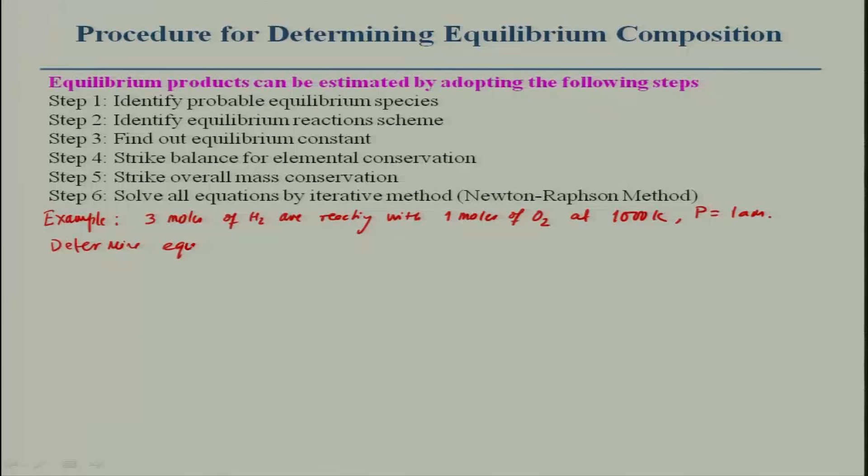In this example, 3 moles of hydrogen are reacting with 1 mole of oxygen at 1000 Kelvin and pressure 1 atmosphere, and we will determine the equilibrium products. So 3 moles of hydrogen react with 1 mole of oxygen going to the products. Of course, what will be the product?

Step 1 is to identify the probable species at equilibrium. So what are those species? Definitely H2. Then definitely oxygen, then water, and what else? H, O, and OH. Let us say we take this number of species. I can take more also, but in this case these are the probable ones.

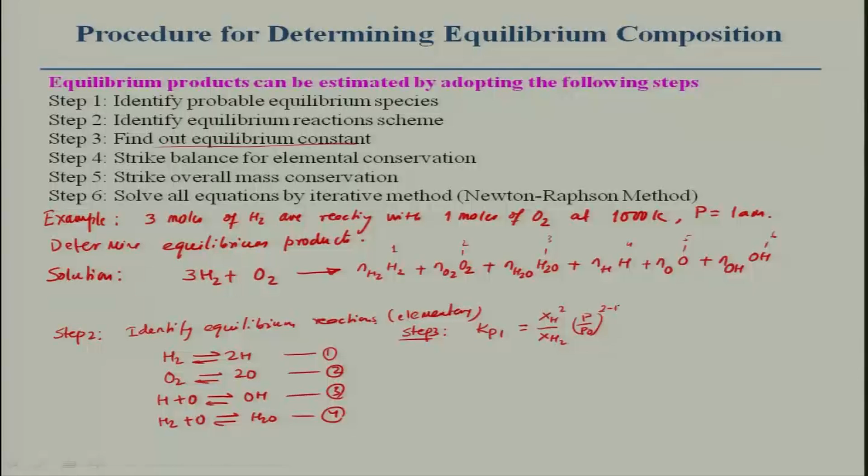If you look at the formula I had derived for arbitrary reactions, you can use that, or you can use partial pressures and then convert. So, in this example P is 1 atmosphere, and P naught is also atmospheric pressure. That means P by P naught is always 1 in this example, so Kp1 is equal to XH square by XH2.

Can I not say this is equal to e to the power minus delta G T naught divided by RU T? So, I can write down 2 G H T naught minus G H2 T naught, divided by RU T, and these are known from the table corresponding to this temperature, 1000 Kelvin. RU is known, T is 1000 Kelvin, and from the table I can get these values. I will not do that, but I can get them.

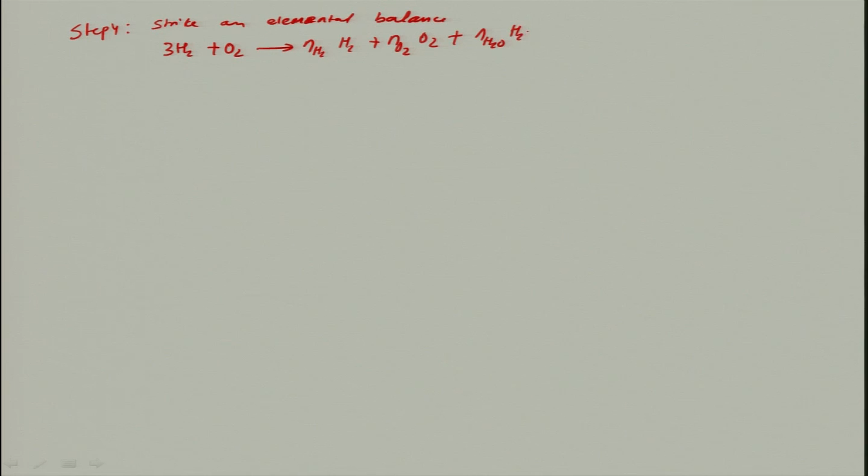So, let me write down what we did: 3 H2 plus O2 going to N H2 H2 plus N O2 O2 plus N H2O H2O plus N H H plus N O O plus N OH OH. This looks like eta, but it is actually N.

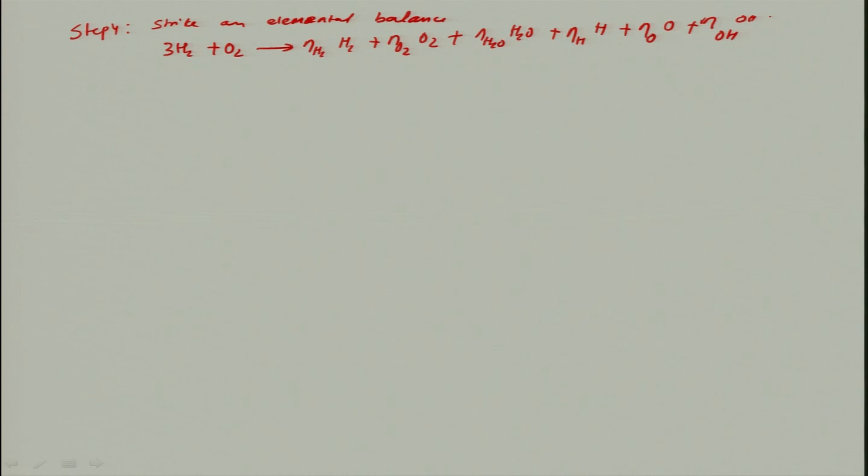So, the total number of H moles given, NH, is 6, because 3 moles of hydrogen. And NO, total moles of O, is it 3 or 2? Because 1 mole of oxygen, it is 2. So, we will have to do an elemental balance.

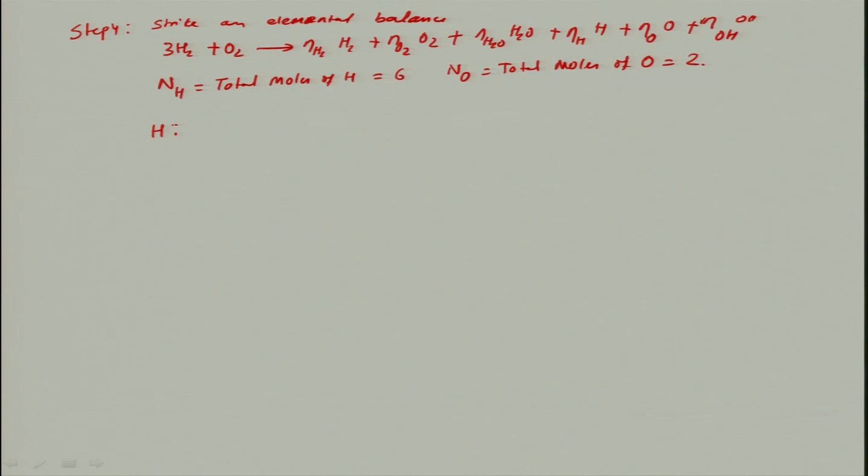So, for H, what I will be doing: 2 N H2 plus 2 N H2O, because we are looking at the product side, and then N H, only one is there, then N OH, is equal to what?

NH, yes or no? Total number of moles in the product should be same as whatever is there in the reactant. Similarly, for O, I will get 2 NO2, right, and N water, because this is 1 O in the product and this is 0 because there is no O, and in this case it will be NO plus NOH is equal to NO, right.

Let us say this is equation A, this is B. I will just divide it, right. Should I divide? What will I get if I divide? That means NH by NO I know, and then I will find it, but these are in moles, and I need to express them in terms of mole fraction. So what will I have to do? I will have to divide this equation by N total number of moles, right.

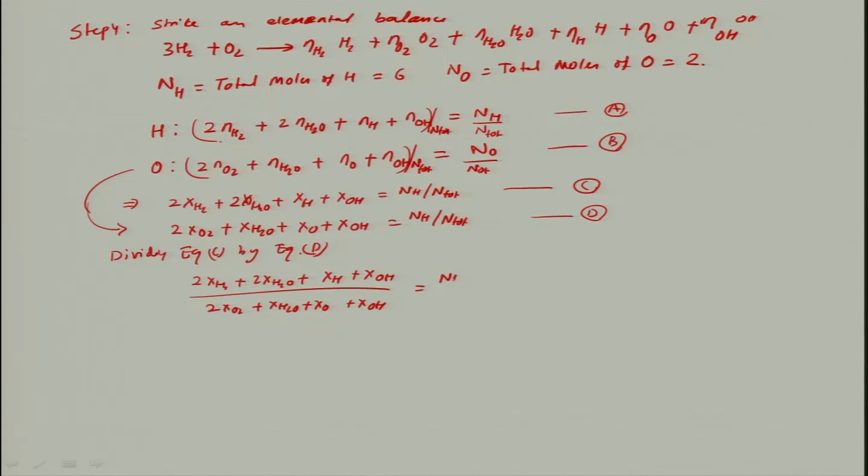If I say this is C and D, dividing equation C by equation D, what will we get? 2xH2 plus 2xH2O plus xH plus xOH divided by 2xO2 plus xH2O plus xO plus xOH is equal to NH by NO. Okay, there is an error here, NO in equation D. N total cancels out, and this will be equation 9.

Now, NH is known or not? NO is known. So these are unknowns and you will have to evaluate them. And what will I do now? Step 5. Close the equations. Basically, you will have to balance. What is that? Summation of mole fractions equal to 1, because these are 5 equations and 6 unknowns. So we will have to close the equations.

For that, this is equal to xH2 plus xO2 plus x water plus xH plus xO plus xOH is equal to 1. This is 10. That means equations 5, 6, 7, 8, 9 and 10 are to be solved simultaneously.

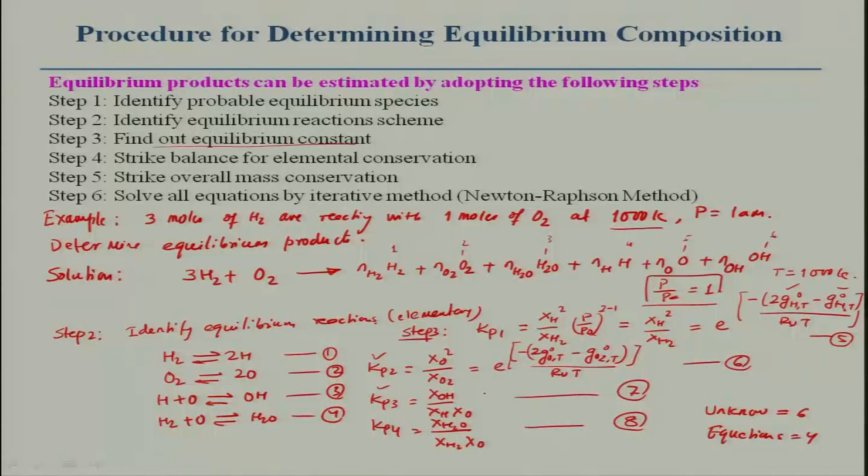See, if it is a linear equation, you know how to solve it, but if it is a non-linear equation, it will be difficult. Why is it non-linear? Can anybody tell me why? You will have to go back to equations 5 and 6. If you look, this is xH square, xO square, and xH xO. So, therefore, these are non-linear in nature,

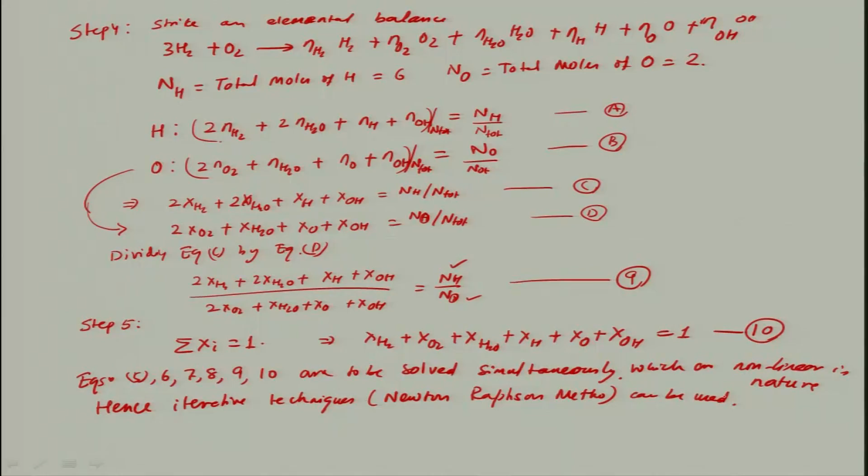hence iterative techniques like numerical methods can be used, and one is the Newton Raphson method. So it is not that easy to really do this. You are talking about the case where the temperature is known and the equivalence ratio or fuel air ratio is known, and then you are finding the compositions.

Now, imagine the adiabatic temperature is not known. For a fuel air mixture, you do not know the temperature. How will we get this composition? These are all interlinked, because temperature is dependent on this composition. Why? Because Gibbs free energy is dependent on the temperature, and since Gibbs free energy is different, the Kp values will be different. So, therefore, the composition will be different. Are you getting it?

How will we do it? It is a very difficult thing, and you will have to do it iteratively. Now we are going to see how. We have to devise a procedure for determining equilibrium compositions, that means mole fractions of species, and also adiabatic temperature, both are interlinked. Okay. So I will just tell you the procedure.

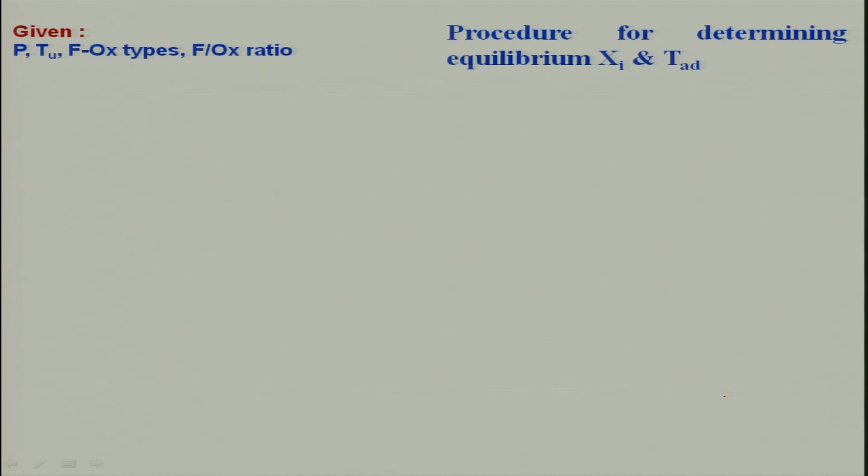Given that pressure is given and the unburnt temperature is given, it need not be 298 Kelvin, it may be 600, it may be 500, whatever, or it may be 298 Kelvin. And the fuel oxidizer type, whether it is hydrogen air, methane air, propane oxygen or kerosene oxygen, also has to be known, otherwise you cannot do it. And the fuel oxidizer ratio has to be given. Is that clear? This has to be given.

Now, what you will do? You will have to assume an adiabatic temperature, because we have already seen in the last procedure that temperature should be known, then only I can find out composition. So, I will assume a T adiabatic temperature. Then compute the equilibrium composition at a particular pressure and adiabatic temperature; we have already seen how we will have to do that iteratively. Okay. That is also iterative. This is an iteration inside iteration, you will have to do that now.

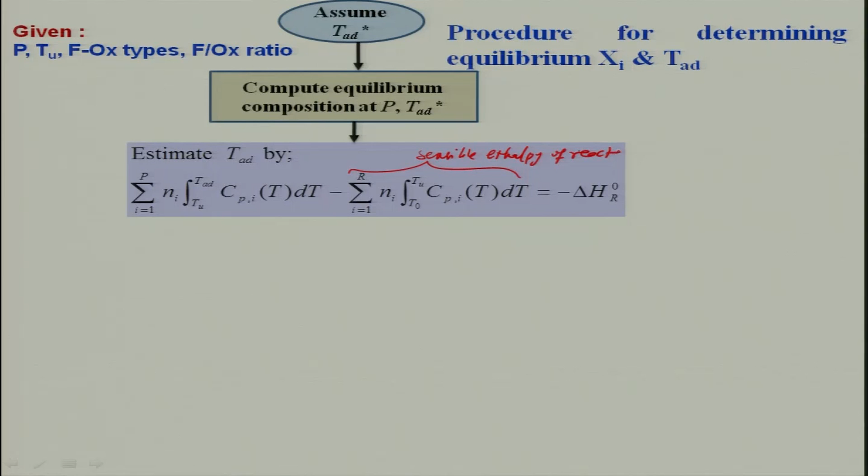Okay. So, then what you will do? You will estimate the adiabatic temperature by, this is your sensible enthalpy, right. This is your sensible enthalpy of the product and this is the sensible enthalpy of the reactant. Are you getting? Of reactants. This is sensible enthalpy of product.

Involving various species. Ni will be various species. If it is a product, if I consider methane, there might be 20 species or 10 species, at least 15 species kind of things, right. And if it is a reactant, of course, if it is methane-air, only methane, oxygen, nitrogen, right. Reactant will be easier to handle, but product will be several of them.

Now once you have found out the composition, that means you know this Ni, right, or in terms of mole fractions, then you can do it very easily, and this is nothing but your heat of reaction. This is heat of reaction at STP, right. And then by this you will find out T adiabatic, because you will have to integrate. Keep in mind this Cp is a function of temperature, right, that you will have to plug in and then integrate. That integration is not that easy.

The way we did the example is not the way, okay. There you will have to integrate, because for the various temperature ranges you will have to use different Cp values. I had shown that, I think, right. And then you will have to find it.

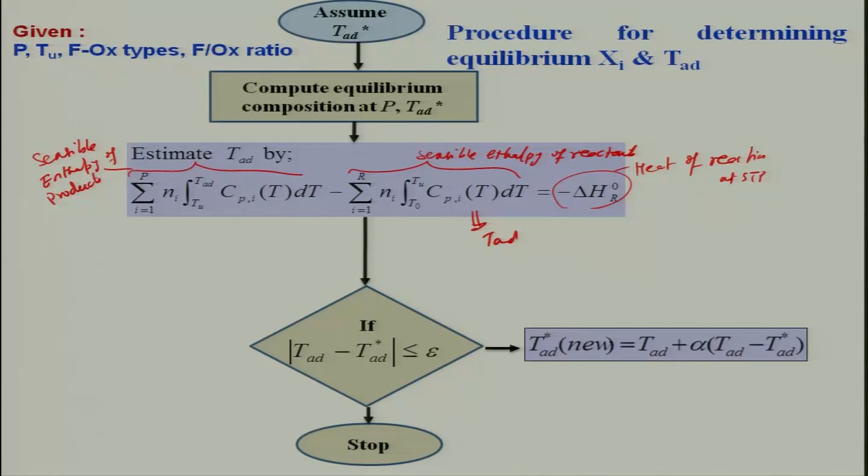Otherwise you will have to find out a new adiabatic temperature, that is equal to T adiabatic plus alpha into T adiabatic calculated minus T adiabatic, right. And this alpha is basically the under-relaxation parameter. Then you will go back to here and again calculate, because this is a new adiabatic temperature, then again compute the composition, again go through all this process till you get this error. This is your error, okay.

This error is the acceptable error, right. As I told, if it is 1%, you are happy, fine. If you are happy only with 0.05%, you will have to go on doing that. That means it is iteration in between iteration. This is quite complex. Are you getting the point?

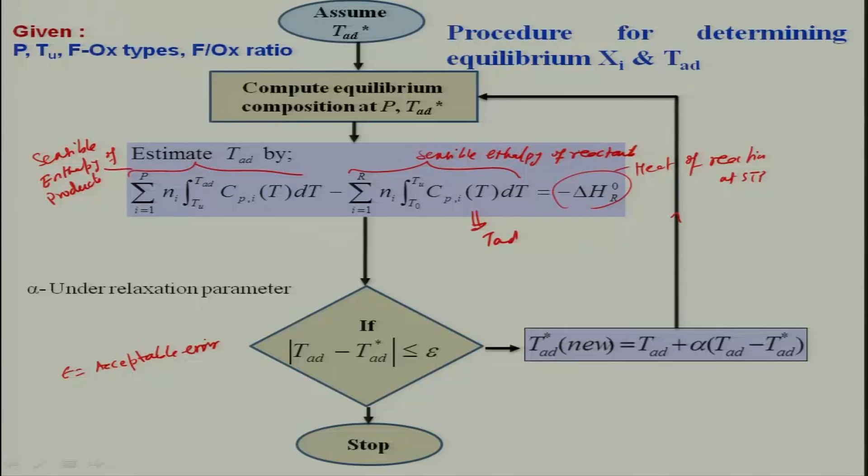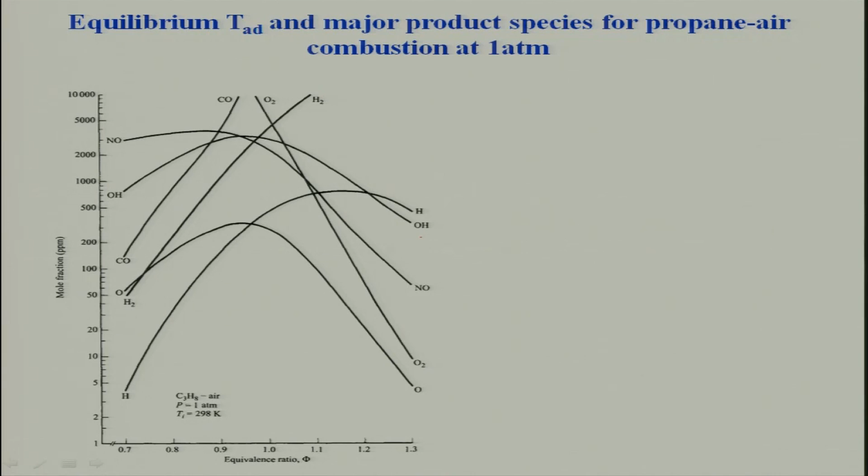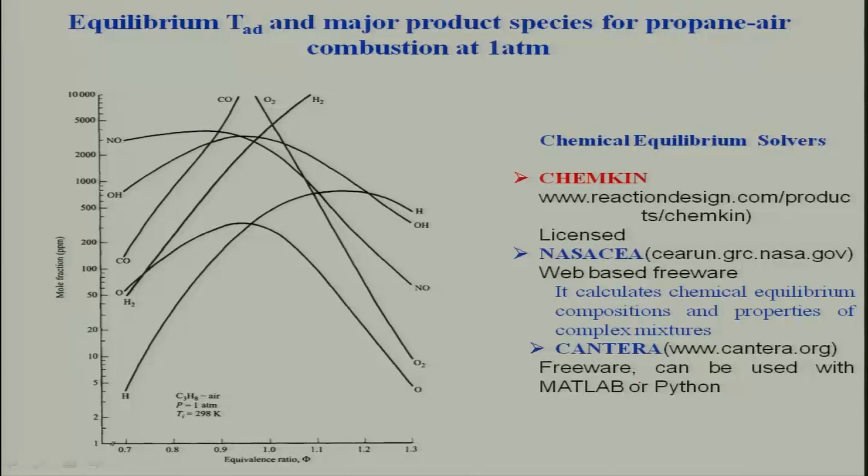Now for that you can use several softwares which are available like Chemkin, NASA CEA and Cantera, and I was told NASA CEA basically is a free software. Some of these you will have to buy. Cantera is free, where you can use MATLAB, Python kind of things. It is a plug-in, you can plug it in and do programming in it. There are several other softwares also available on the internet. Please explore and find out, so that we can use this thing, right.